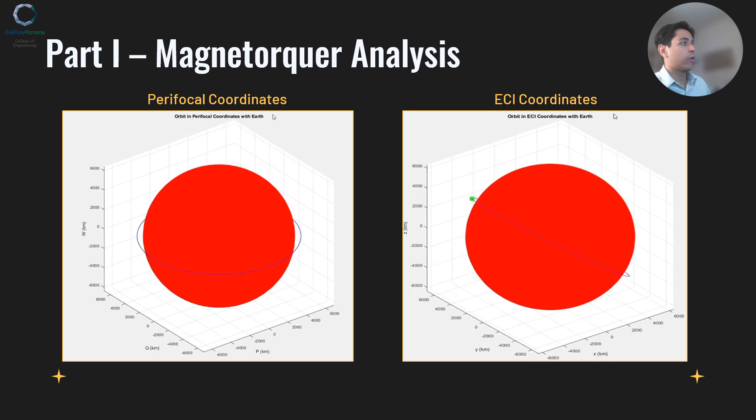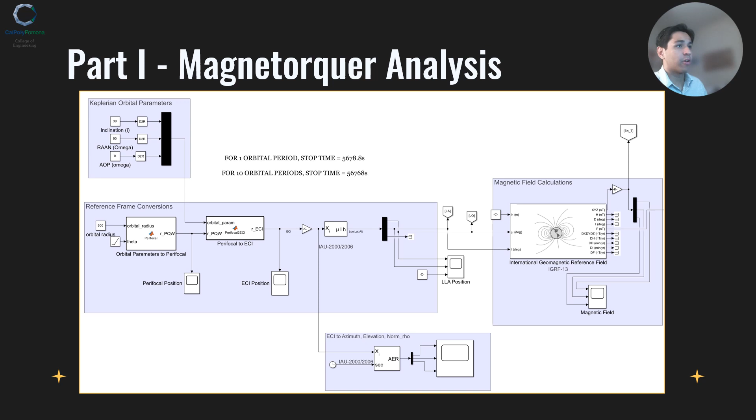Given its orbital parameters, we were able to find perifocal and ECI coordinates. Then from the ECI coordinates, we were able to acquire latitude, longitude, and altitude. The first part of our Simulink model goes from perifocal to ECI, then to LLA coordinates, which is then plugged into the IGRF Simulink block model, which returns the magnetic field intensity in nanoteslas and the NED reference frame.

Once a magnetic field was found, we could then calculate our control torque utilizing the equation on the bottom left-hand side.

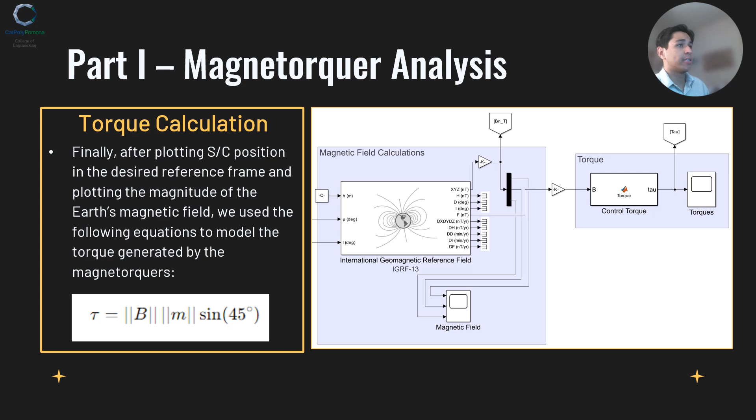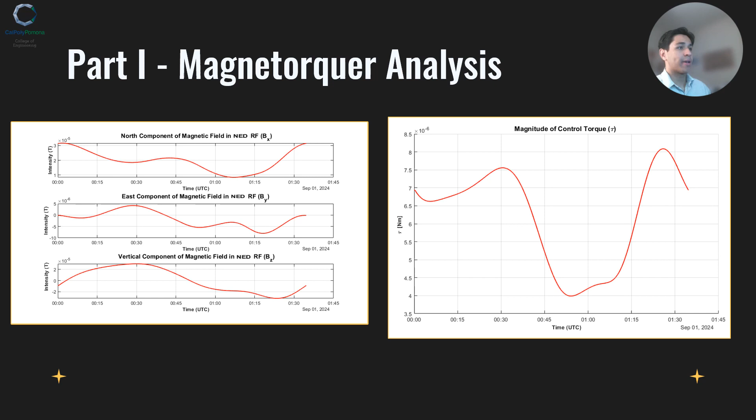Here are the results of our magnetorquer analysis. On the left-hand plot, you can see the intensity of the magnetic field, and on the right-hand plot, this is the magnitude of our control torque. This is all for one orbital period.

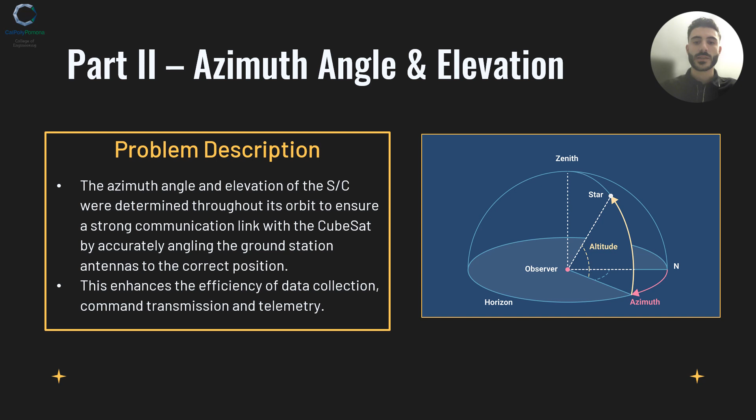For the second part of this project, the azimuth angle and elevation of the spacecraft were determined throughout its orbit so that we could ensure strong communication between the ground station and the spacecraft by accurately angling the antennas to their correct positions for effective communication. This was done to enhance the efficiency of data collection, command transmission, and telemetry.

To calculate the azimuth angle and elevation of the spacecraft, the Earth-centered inertial reference frame coordinates of the spacecraft were used as an input to the ECI position to AER block on Simulink, along with time as an input, to calculate and plot the azimuth angle and elevation of the spacecraft.

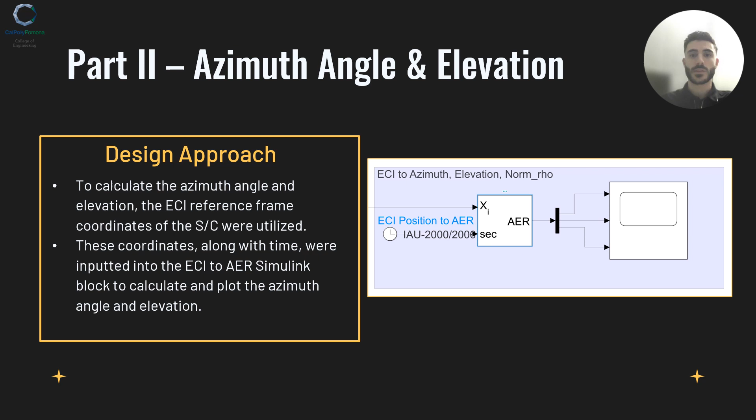We set a minimum elevation angle of 5 degrees, since below that angle the CubeSat would be considered too low on the horizon for effective communication.

Although this part of the project wasn't directly used for determining the feasibility of the use of magnetorquers for attitude control, specifically for nadir pointing spacecraft, it can be used for future projects that require effective communication and data transfer between the ground station at Cal Poly Pomona and the CubeSat.

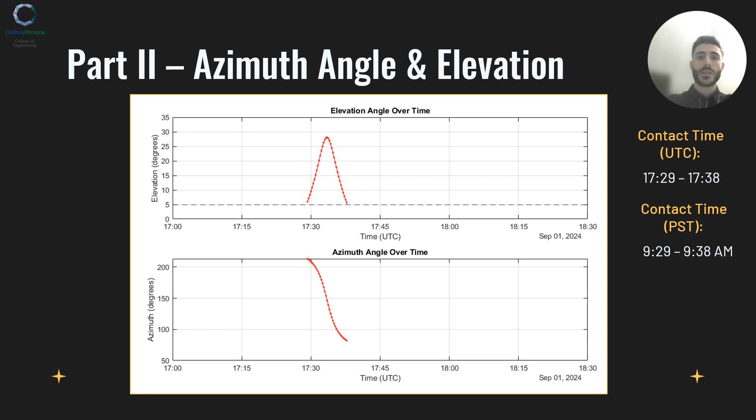In part 3 of the project, we wanted to control the spacecraft, so we needed to derive the equations of rotational motion incorporating control torque, disturbance torque, and gravity gradient torque. We did this for yaw, pitch, and roll, and then inputted these equations into a MATLAB function block.

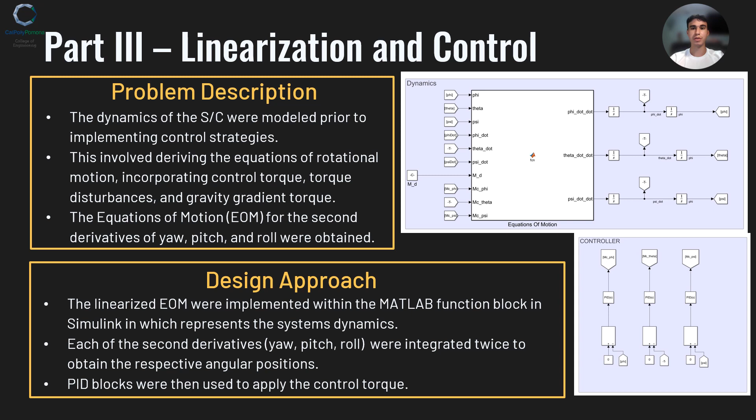We took 2 integrals of it to obtain the angular positions, and once we were there, we applied PID control to obtain control torques, and we compared these with the available torques from the magnetorquers to see if the mission was feasible.

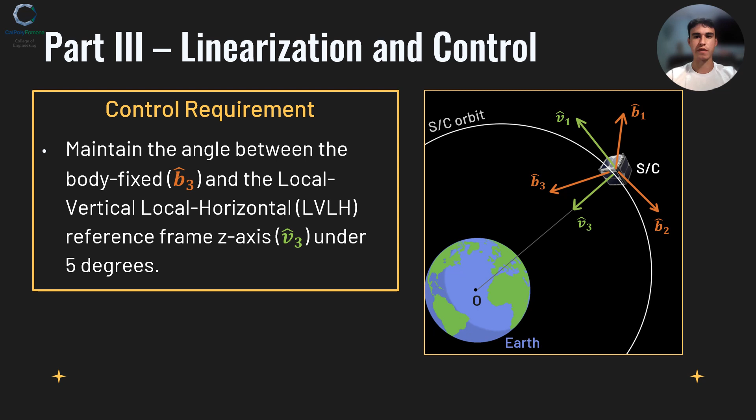So we're going to use those equations of motion and the angular rates to control the angle between the spacecraft's body axis and nadir. We want that angle to be less than 5 degrees because we want the spacecraft to be nadir pointing at all times, so we have better communication with the ground station.

Here we start to derive the equations of rotational motion. We start with the basic rotational motion formula, incorporate the gravity gradient formula, and eventually solve for theta, so we can isolate the double derivatives, which we will derive in a second.

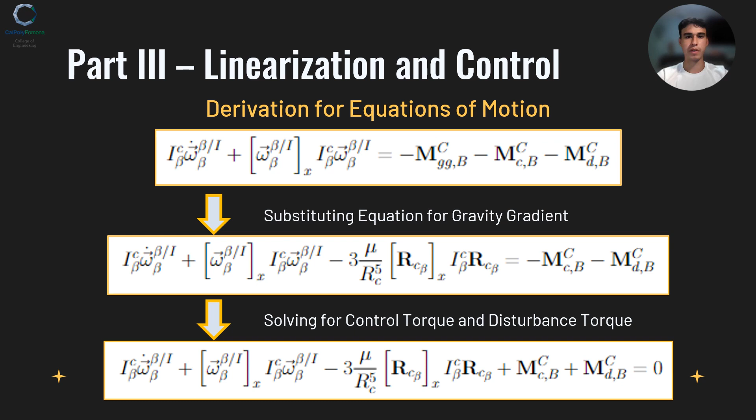Here we have the conversion of RC, pretty much the semi-major axis of the orbit, transformed into body fixed reference frame coordinates, because they're currently in theta reference coordinates, so we use the rotation matrix RB theta to do so.

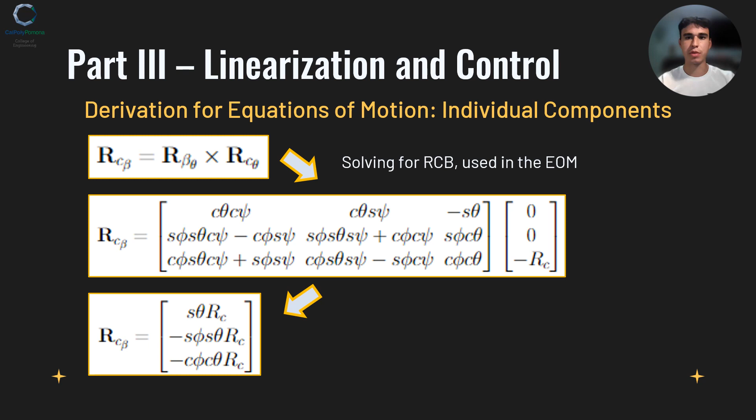However, since the angles are so small, we can apply a lot of simplifications. So we set the sine of the angle equal to just the angle, and the cosine of the angle equal to just 1, because the cosine of something near 0 is pretty close to 1, and the sine of a small angle is equal to just the angle. We multiplied some of these together, as you can see in the previous equations, and realized that they're a lot less than 1, so we set them equal to the cosine of just the angles.

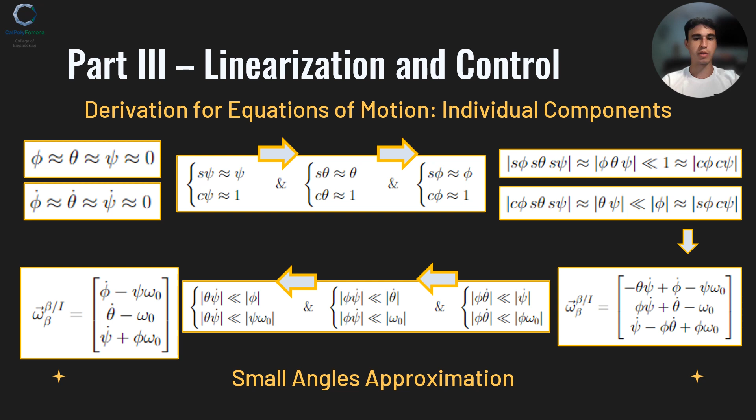We have a further derivation in the bottom right hand corner. We then apply further simplifications in the middle and the bottom, and we have our finished formula for the angular velocity of b with respect to I, the body fixed reference frame coordinates, in the bottom left.

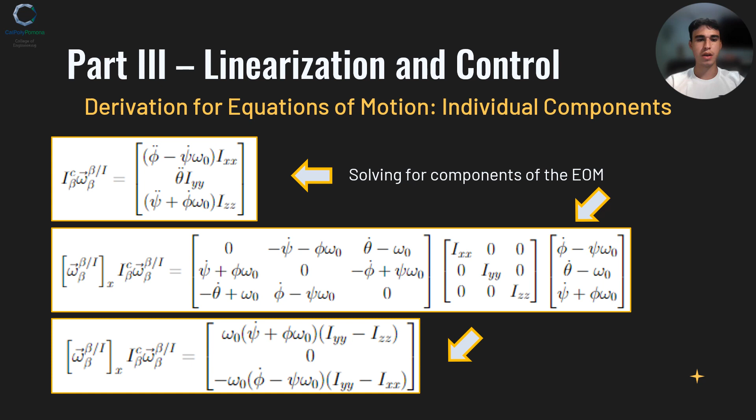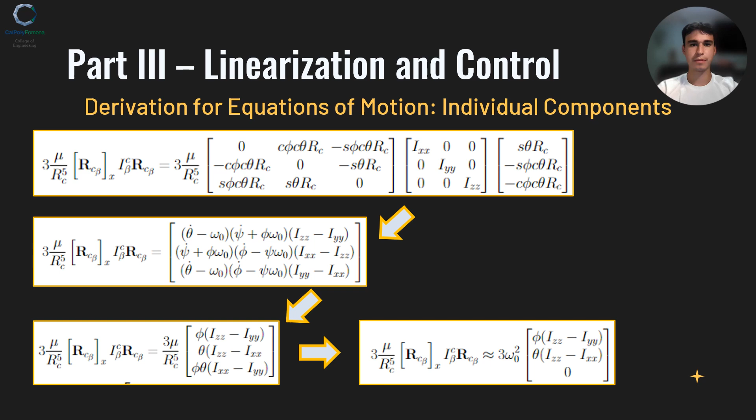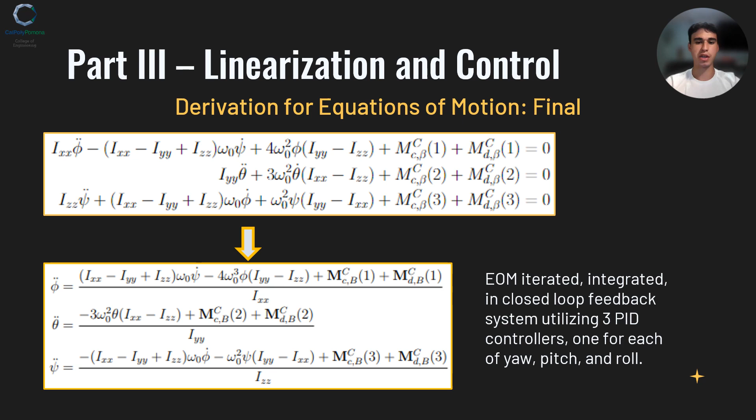So putting everything together, we have the finished derived formulas for the rotational equations of motion, incorporating the control torques and the disturbance torques. We solve these for the double derivatives, which we input into the MATLAB function block, and we integrate it twice to obtain the angular positions. From here, we send it out to 3 PID controllers, one for each of yaw, pitch, and roll, to obtain the control torques.

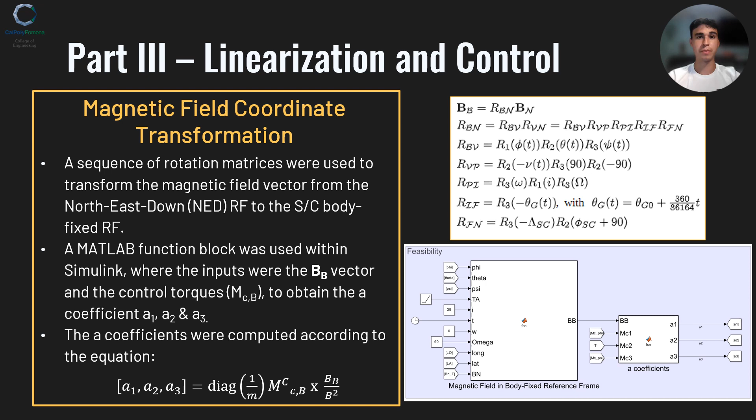If they were within this range, then the mission is indeed feasible, and that A value is proportional to the current flowing through the coil of the magnetorquer. And if it's greater than 1 or less than -1, then the mission is not feasible.

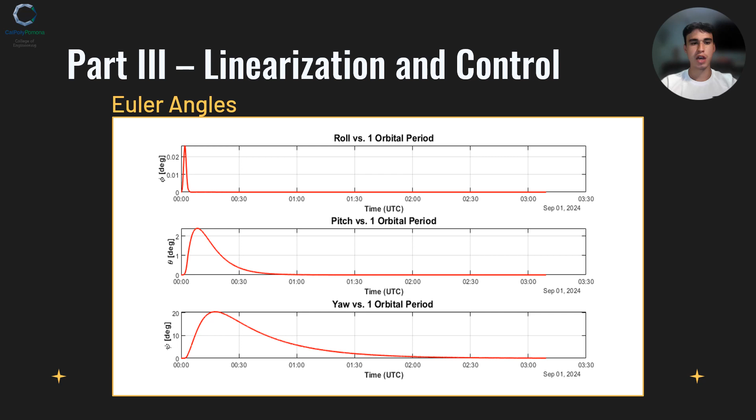Here we have the Euler angles compared with time. At the start, there is quite a bit of a disturbance due to the disturbance torque, but we will see that the control torque does cancel this out on the next slide.

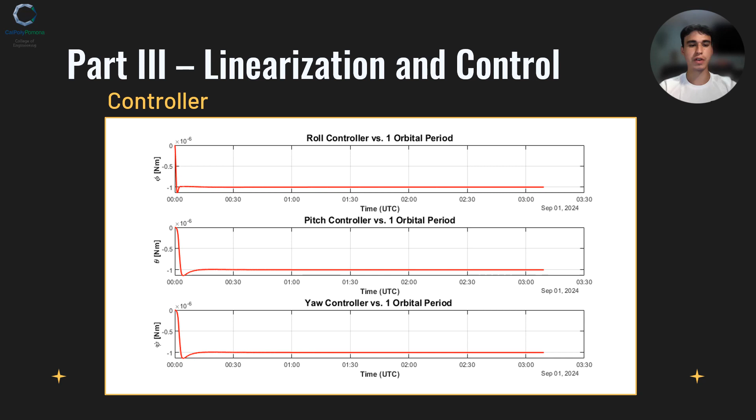Here we have the control torque compared with time. As you can see, it does kind of correlate to the Euler angles. We needed to apply a torque to set those angles to 0, and you can see that at the very start. And then it eventually levels out because we don't need that much torque.

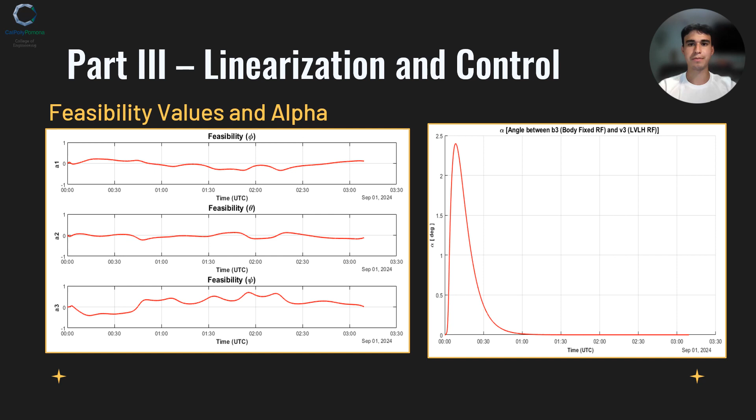Now let's wrap up this presentation by going over some conclusions and recommendations that we came up with. For the magnetorquer feasibility, we concluded that indeed the magnetorquers do generate enough control torque that's required to keep the satellite in a nadir pointing direction.

For the controller, ultimately it was capable of maintaining the spacecraft nadir pointing. The requirement was for the alpha angle, which is the angle between the B3 and V3 direction, to be less than 5 degrees, but we were able to keep it to less than or equal to 2.5 degrees, so we exceeded the requirement there.

Now for the feasibility of the project, we did the analysis for the coefficient of feasibility A and determined that it's going to be between -1 and 1, so therefore the project and the design is feasible. And for recommendations for future improvement, we could test out different magnitudes of disturbance torque to see if the control law is able to maintain the requirements, and just to simulate different disturbances that the satellite could see in orbit.